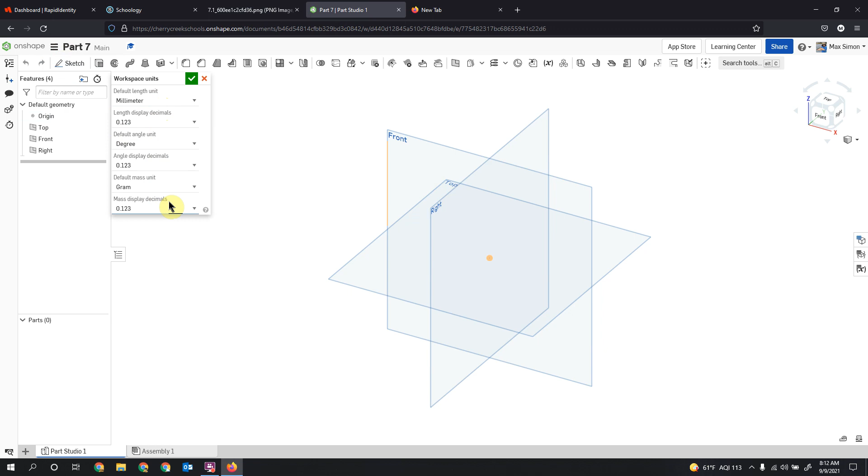All right, so I'm going to build part 7 here, let's get started. I'm going to double check workspace units - millimeter, grams, good. Front sketch on my front plane.

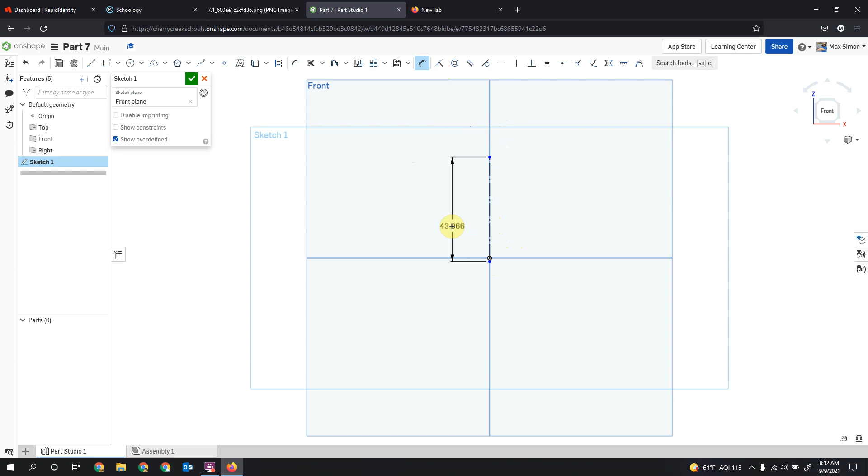My height is 30, so that's where I'm going to start, right here. Construction line at 30, dimension that out to 30. All right, now I'm going to come in here and sketch out my initial shape.

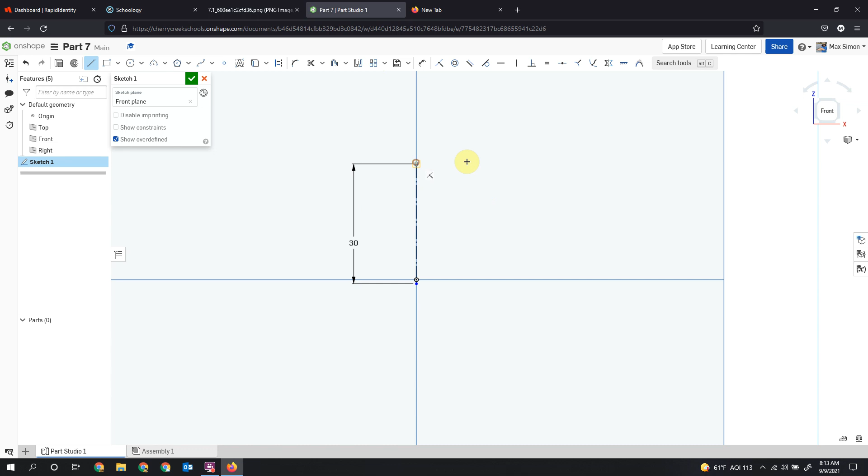Half of this, I'm going to mirror this over. So I'm just going to sketch out half of this shape like so. I believe something like this.

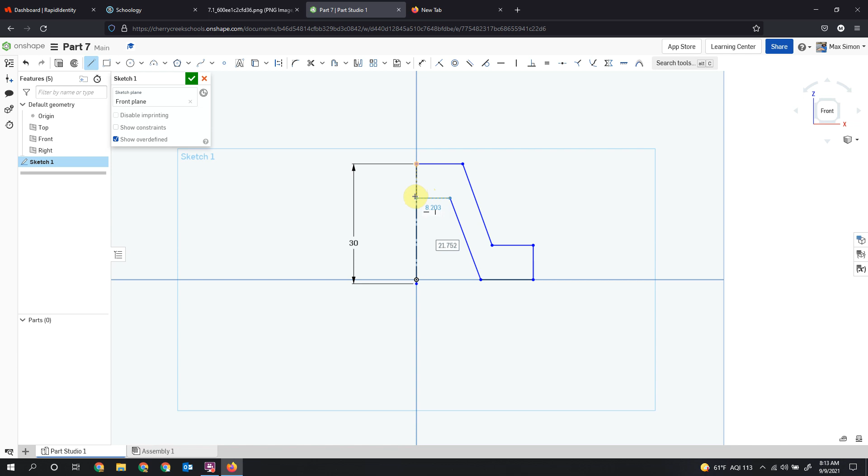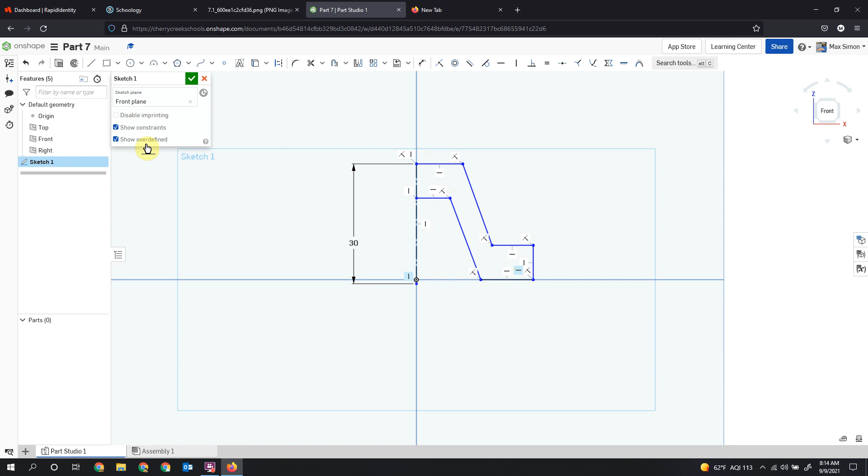Because they make something impossible. But if this line here isn't horizontal, that's problematic as well. So just to give you an idea, that is there in the background.

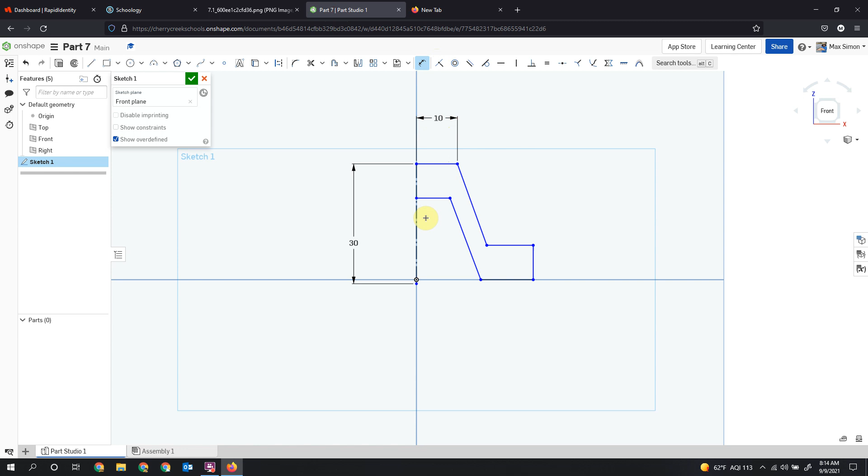So I'm going to start dimensioning this out: 20, 10, 8, 7. I'm going to be cutting all these in half, right? Dimension this line will be 10, this will be 5, from here to here was 8.

So now I should dimension from here to here, keep that at 30, pull that back up, and this one was 7. So 30, 37, and then right here I got 20 to this point, 30 to this point, and then 50 overall. So 20, 30, 50.

So 20 to this point, so that's going to be 10. 30 to this point, so that's going to be 15. And then 50 overall, so this is going to be 25.

All right, and everything now is locked in, right? Everything's black, which means everything's fully defined. And I got an overall length of 40 on that.

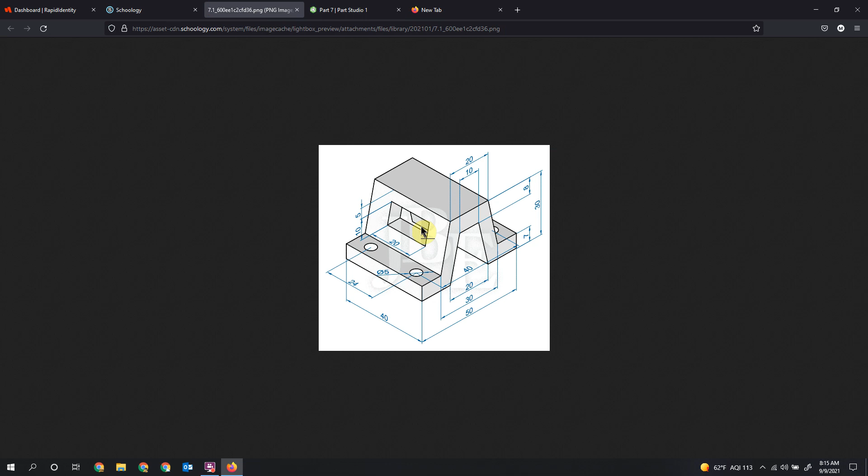So what I'm going to do for this part, since I have this cut here, I will mirror it, but I'm going to mirror the actual part since it's identical on both sides. So I'm only going to extrude out half - I'm going to build half of this and build half of it really well.

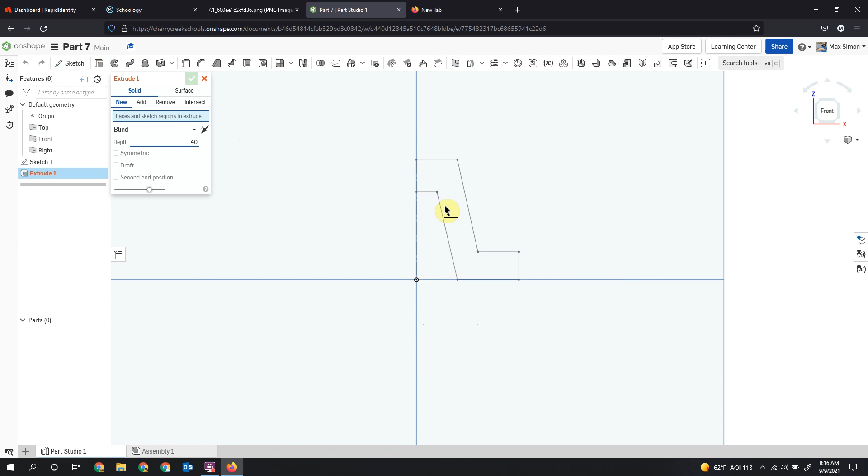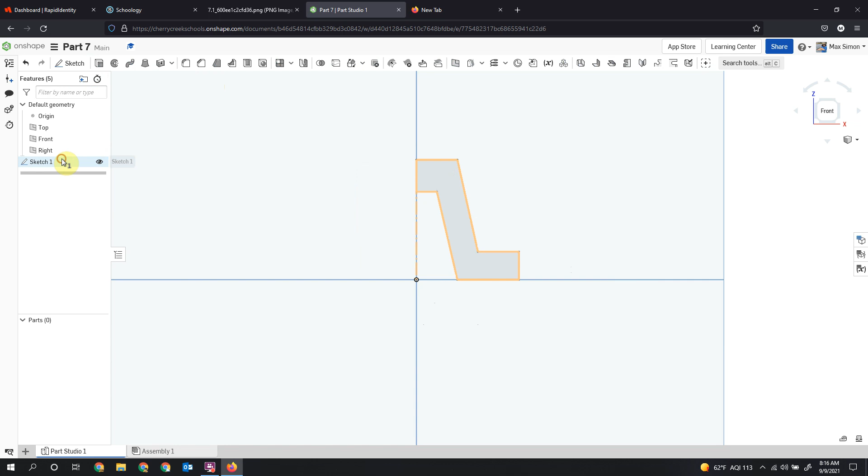And then, as I come out here to my sketch, I'm going to extrude that to 40. I got to click here - for some reason that's not wanting to work. Let me go back. Oh, I'm missing a line right here. Okay, and what that means is I don't actually have a shape, I just have lines. So I got to add this line in here, and now I have a shape that is grayed in. Now that it's gray, now I can extrude it because I have a shape.

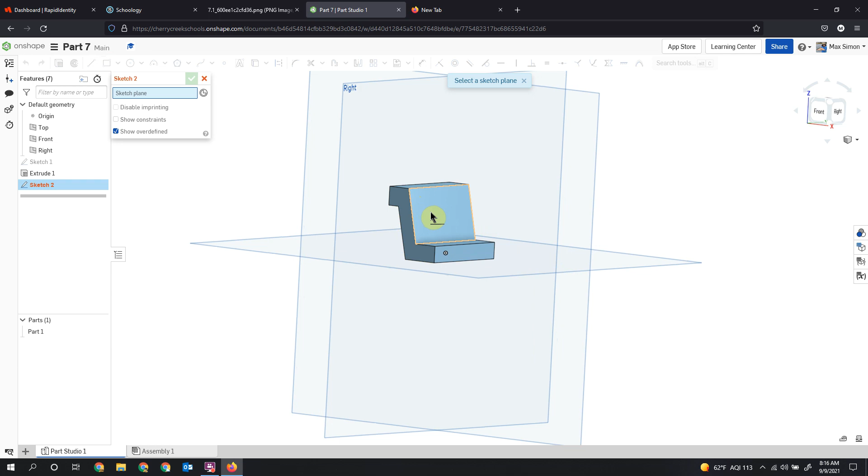So there's my 40. So now I'm going to face it to the right, and I've got my next sketch here. I'm going to be sketching out this hole. So, sketch, and it's asking me what plane. I want to make sure I'm selecting this plane here to sketch on.

And then I'm actually going to do a center point rectangle - it's going to make things easier. I'm going to lock that into the center, and drag it out from the center. All right, so now everything is locked onto the center, and I can start dimensioning parts of this out.

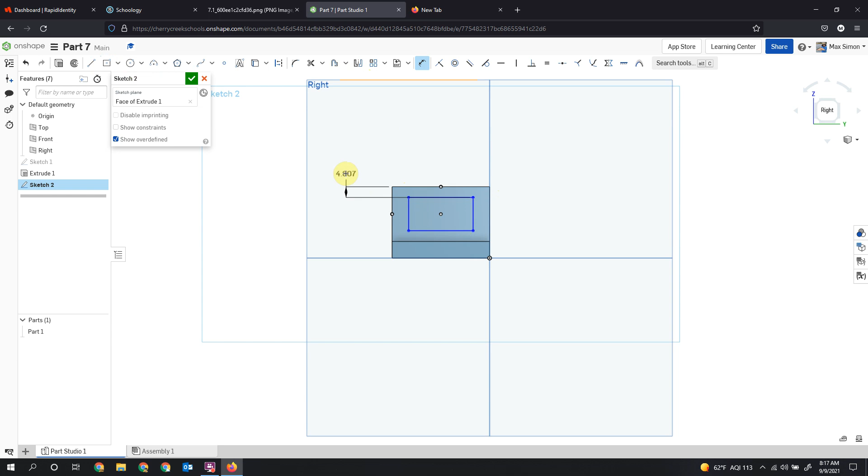I believe that was at 5, and then it's 10 by 20. So this here is a 20.

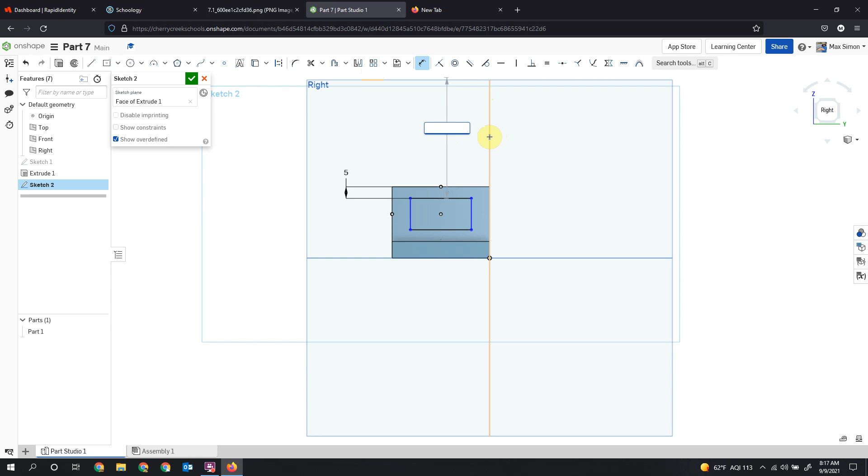All right, so this happens sometimes, and I wish I could explain it to you. I don't really know why, but it's okay. We're gonna just come in here and delete this.

All right, so I'm gonna go off my dimension tool, click back on this, and on my keyboard hit delete. I'm gonna go back into my dimension tool, and just dimension from this line to this line, which will still be the same thing. It'll still give me my 20, and if it's gonna do the same thing, I'm not gonna take a chance - I'm gonna go right here and make that 10.

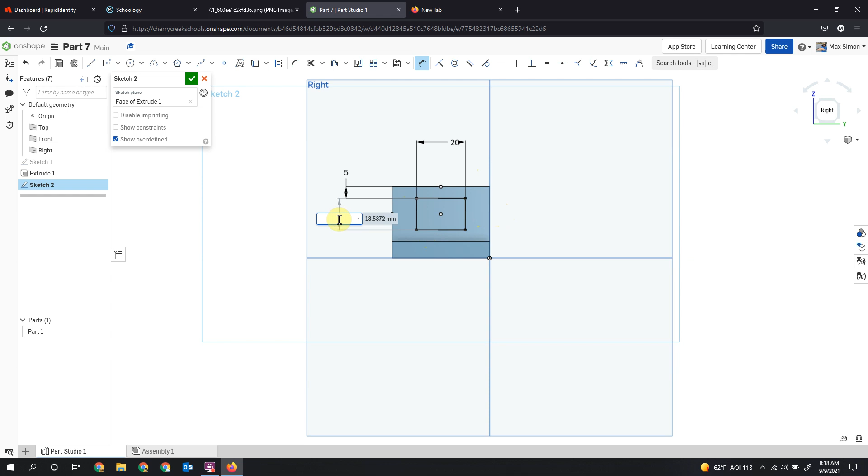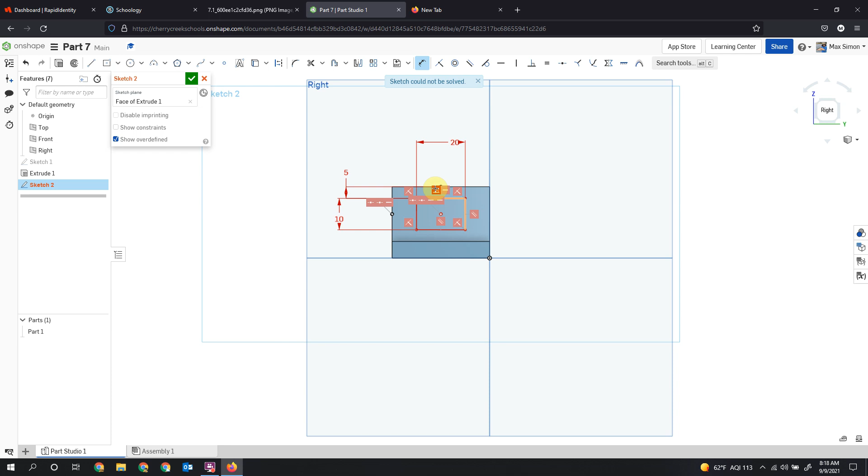All right, now it's messed up about some constraints because it's saying it cannot keep this in the center, since I locked it into the center, and it's saying it can't keep this at 5 and this in the center. So that's okay, I'm just going to delete some of these constraints by clicking on them and hitting delete, so I can keep deleting until it solves. So there we go, now I can't have it locked on the center, that's what it's essentially telling me.

Because it's not centered. So if we look at this, it's closer to the top than it is the bottom. So that's okay.

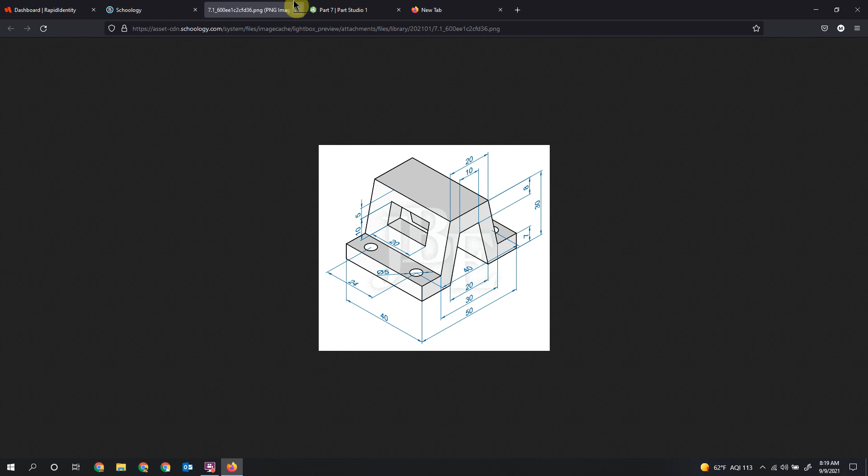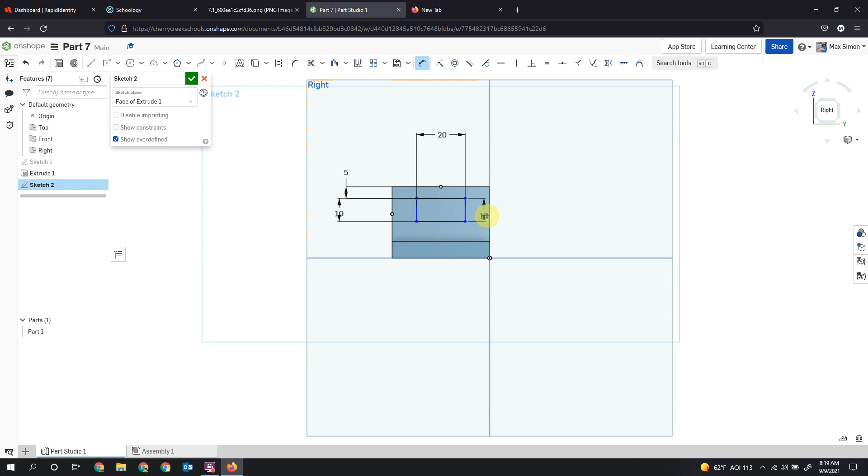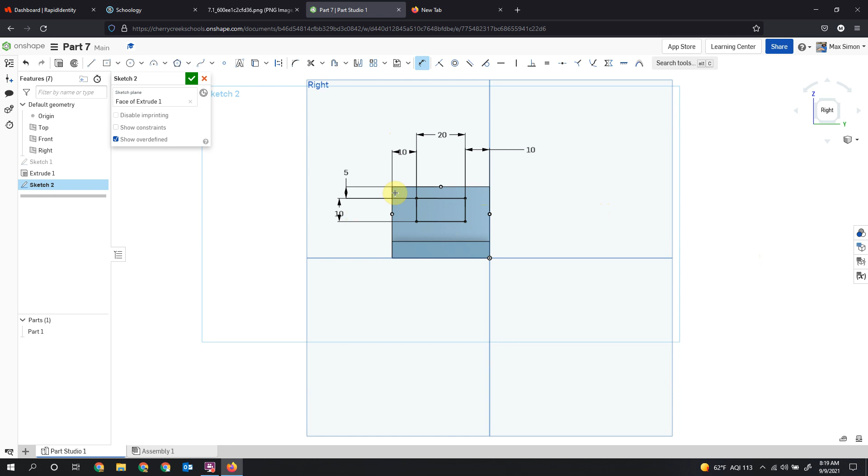So now these are not blue, but we're at 20 wide, 10 high, and now I'm just going to tell it where to go in relation to this space. So I know that if this is 40 overall, and this is 20, then from here to here this should be 10. And if you can see, I don't know if it was set at 10, and this side here should obviously be 10 as well. When it starts there, so there. Now everything is black and it is fully defined.

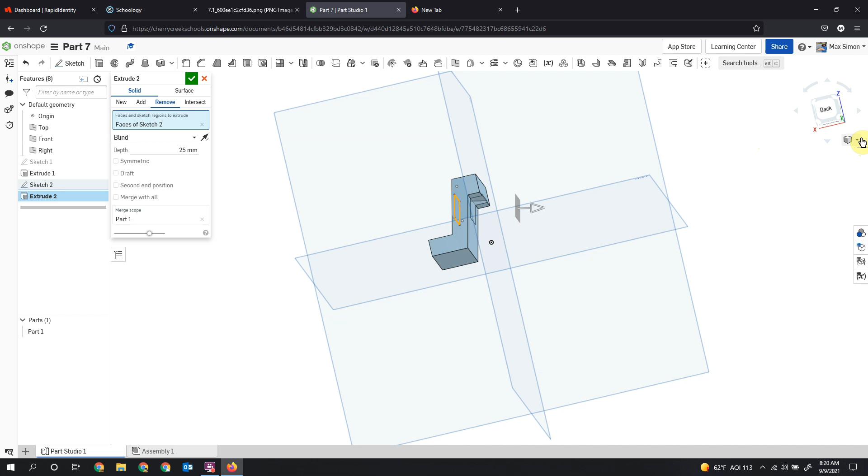I'm going to accept that sketch, highlight my sketch 2, and I'm going to extrude, and I'm going to not add, but remove. And I don't want it to actually cut through, because then when I come through to the other side, it's going to be too much. So I'm going to click on one of these corners here. Actually, I'm going to click on this other corner. Yeah, I'll go right here in the middle.

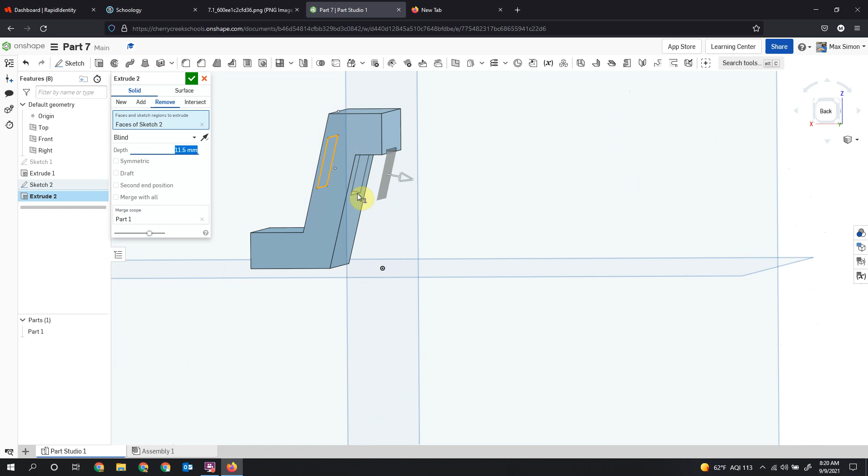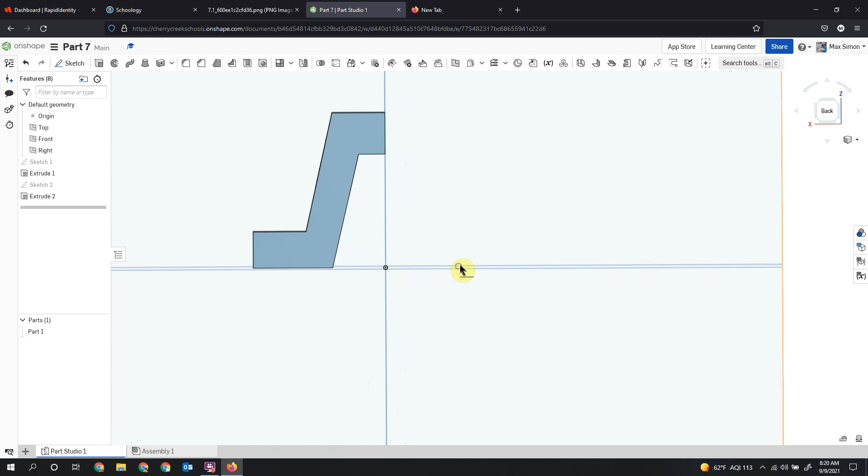If I click on this arrow, I can pick the extrusion myself. So I want it to come all the way through, but not continue. I want it to come far enough into this, but not hit the other side. So I just wanted my plane to end right about there, just on the other side of that. So if it cuts into itself a little bit, that's okay. So right there, that is done.

Now I'm going to work on my holes, and I'm going to do that by going to the top view. I've got 24 distance apart, diameter of 5, and this is telling me there are 40 from center to center, so 20 off of my center line.

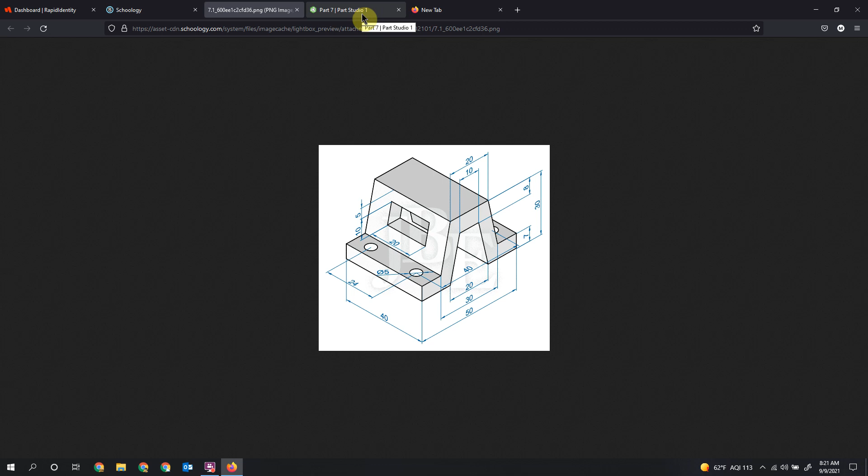All right, so let's start over in here. So my hole is going to be right here. I'm going to sketch, need to select this as my plane. Going to start with that hole right here in the center. And instead of doing 1 or 2 holes like I like to do, I'm going to just mirror it over.

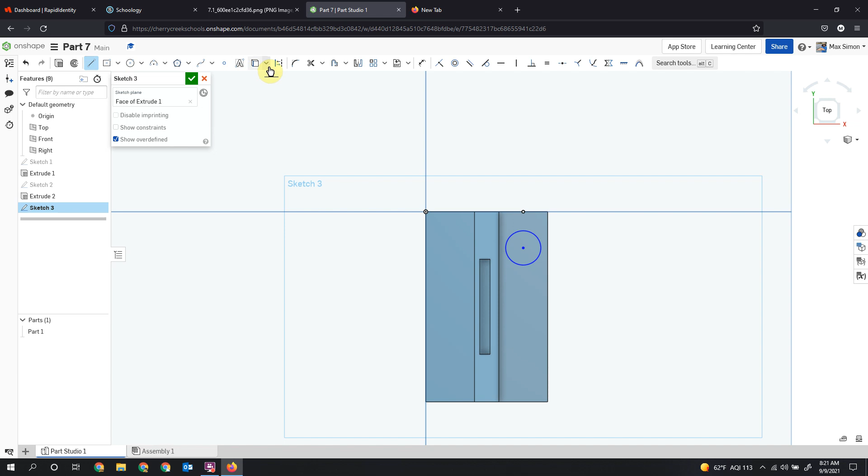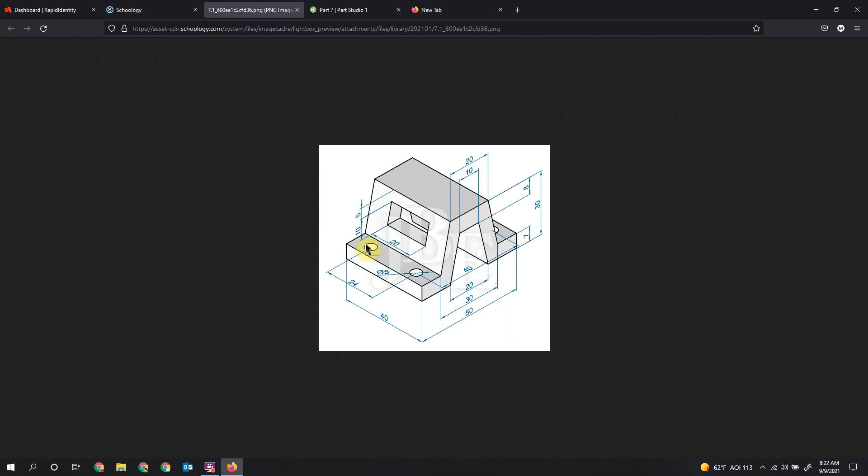So I'm going to drop a line for construction here. If you double click on a line, it just ends that line right there. So I'm going to come in here and dimension this, and I know that's 5. And I know from center to here, I believe that was 24. Let's double check that it's from the center of the circle and not from the outside of that circle. So it is - we can see sometimes they dimension from the outside, you'll get dimension from the outside, but this one's from the center. And then 40 off of the center line, so from here to the center line is 40, so we're at 20, which is all good.

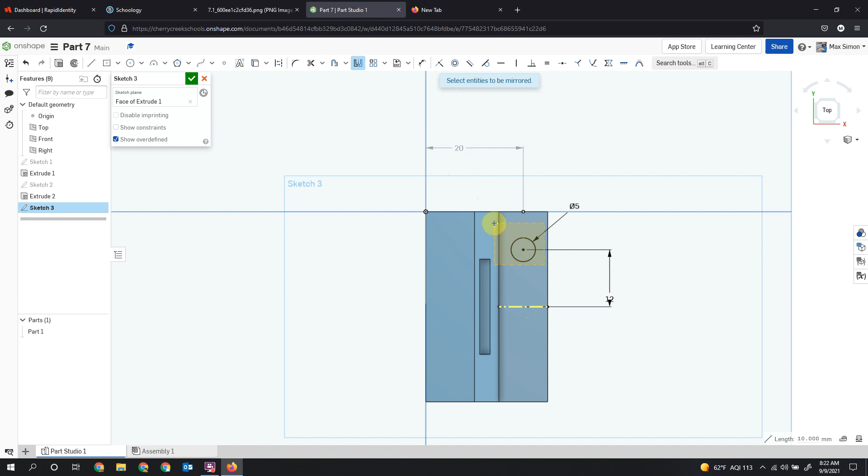So now we just need to mirror that over. So we're going to go mirror. We want this to be the mirror line, this to be what we're going to mirror. Accept that sketch, come here on your sketch, and we're going to remove, and that's all the way through, and we're good.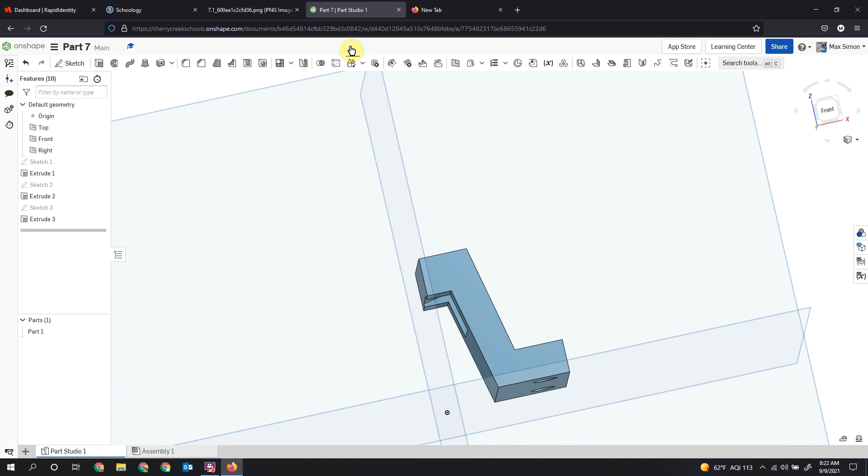So we built out half of our object, which is wonderful. Now we can mirror a feature, so we're going to go mirror, and it's going to ask us what do we want to mirror, and we're going to select part 1, and our mirror plane is going to be this right plane right here. So we can just click on the right plane and accept it, and now it has mirrored that part over completely.

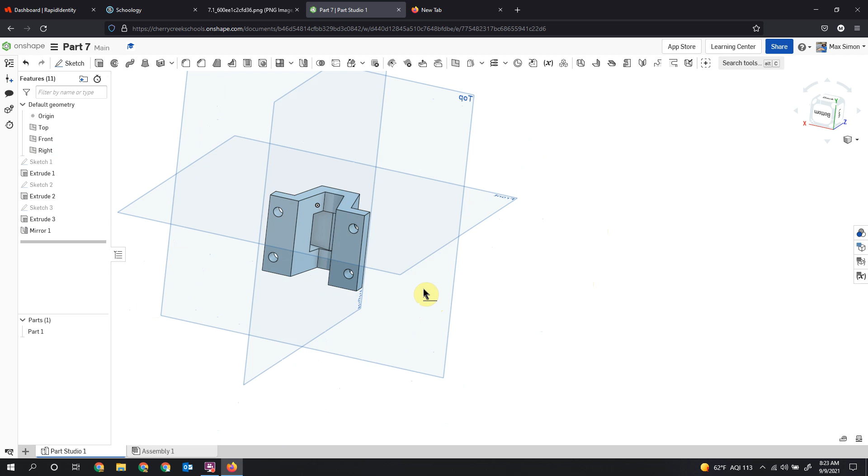From here we are going to assign our material, and I believe that material is brass.

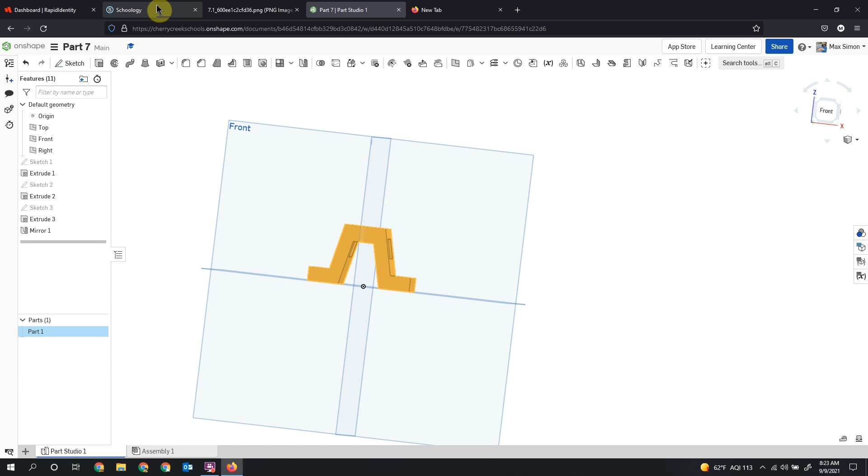Check your properties, check everything here in Schoology with your mass properties. All right.